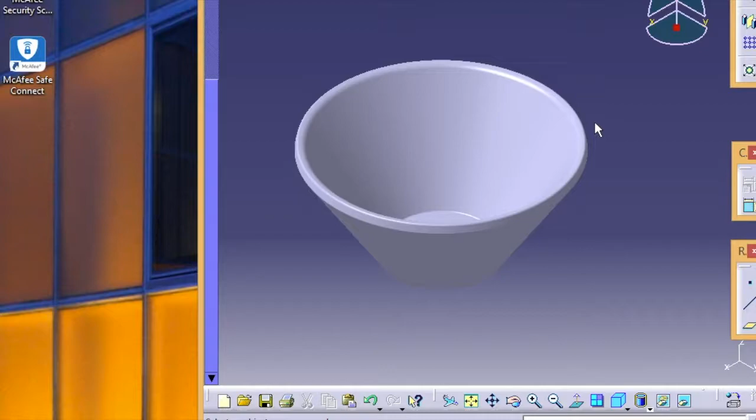Today I'm going to design an Ikea serving bowl. As you can see, I have already designed it in Catia. It's very easy and you can follow it, nothing much. So without further ado, let's begin. This is the model which I'm going to make in this tutorial. Let's start with the mechanical design and part design.

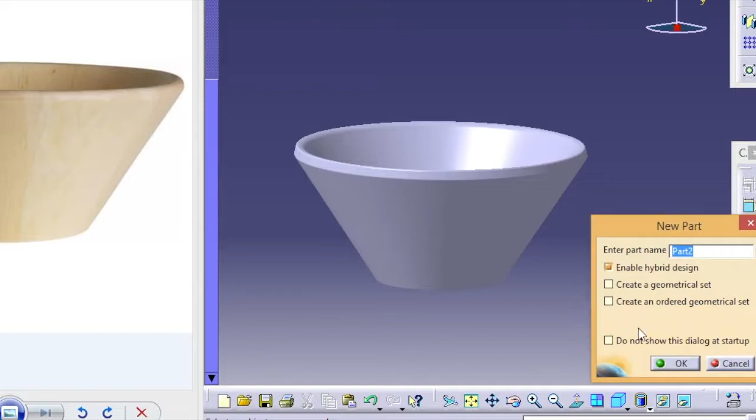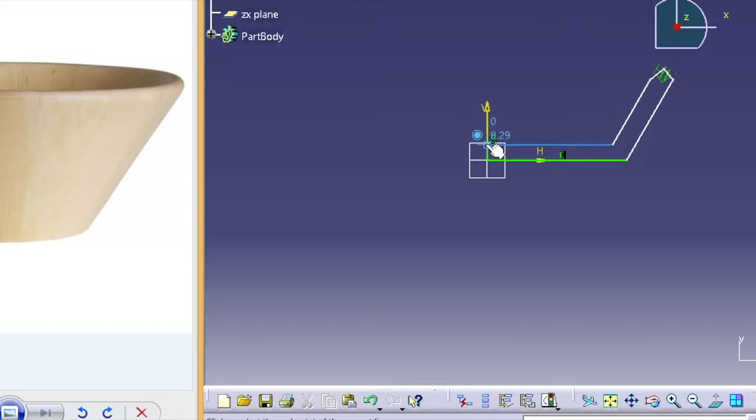Choose any plane, let's take the ZX plane, go for a sketch, and draw something like this. Sketch your profile. As you can see, my profile is ready.

Now I need to give dimensions to this one. Start with the base, this is 60. This one and this one is 12, and the distance between these two is also 12.

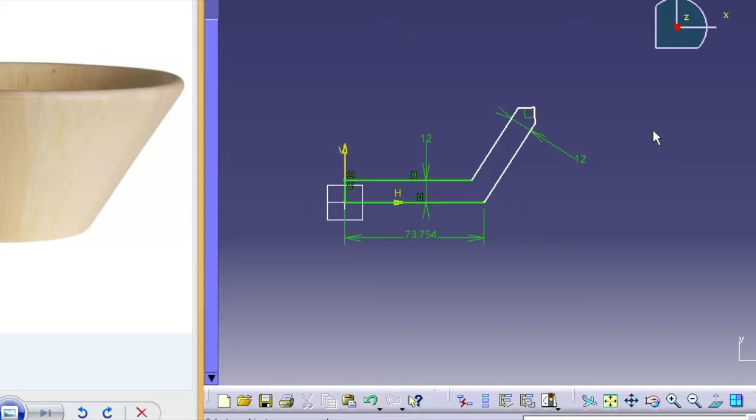Next, from this point to this point, the distance is 140. From this point to this point, the distance is 138, and from this point to this, the distance is 130.

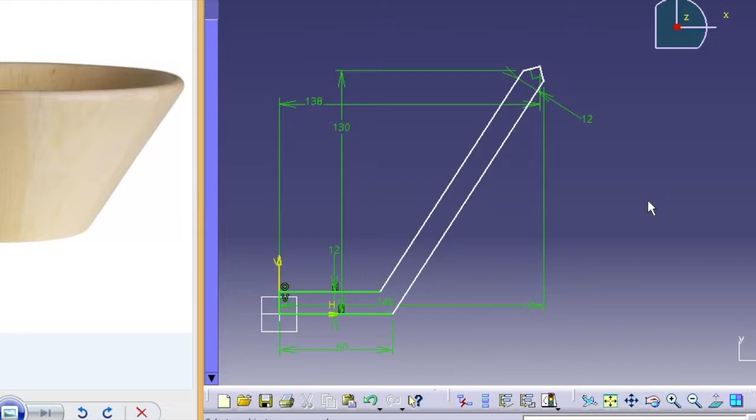This should be 60. I think my sketch is complete. 130, 138. One more distance I would like to give is from here to this part, it should be 122.

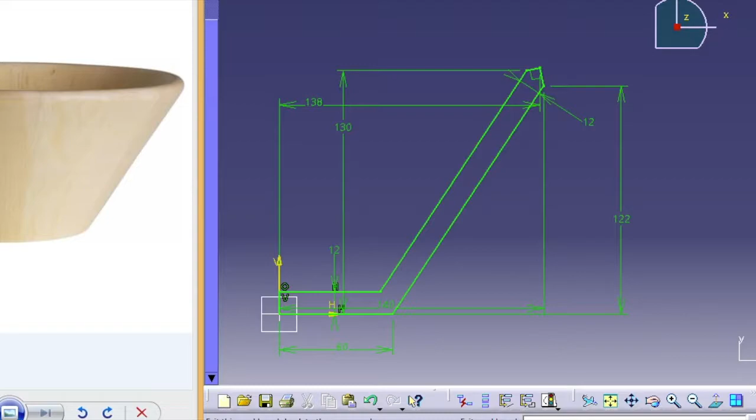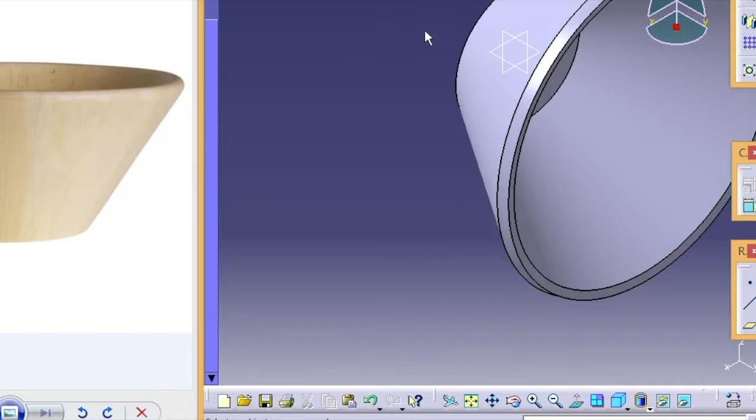Right now, as you can see, my sketch is fully constrained. So let's exit the workbench and go for shaft. Select your preview. As you can see, the bowl is ready.

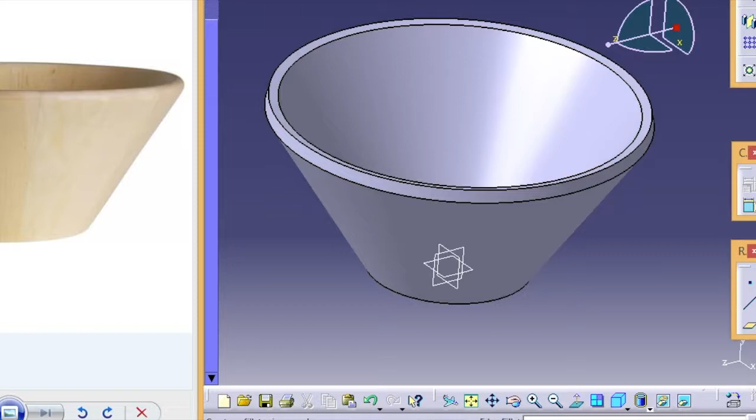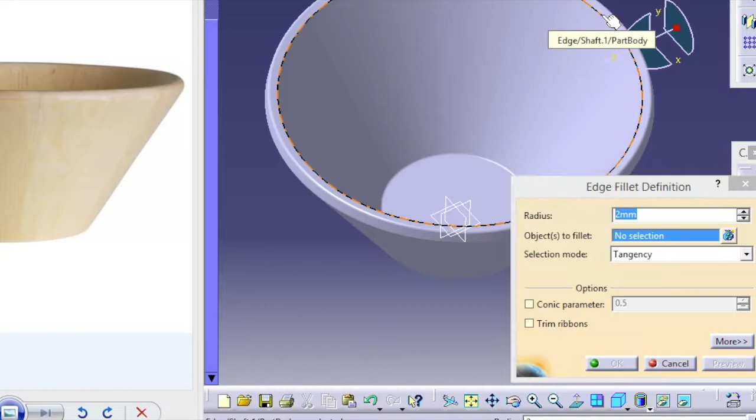I just need to make some few adjustments to fillet it, and the bowl is perfect. So for fillet, let's go for fillet. Select this one, outside, and inside go for 2mm. Okay, again go for fillet, select the inside, give 8mm.

Hide these planes. As you can see guys, this is very much how you can design your Ikea serving bowl in Catia V5, and you can do rendering for this one later. As you can see, I'm not going for rendering in this video.